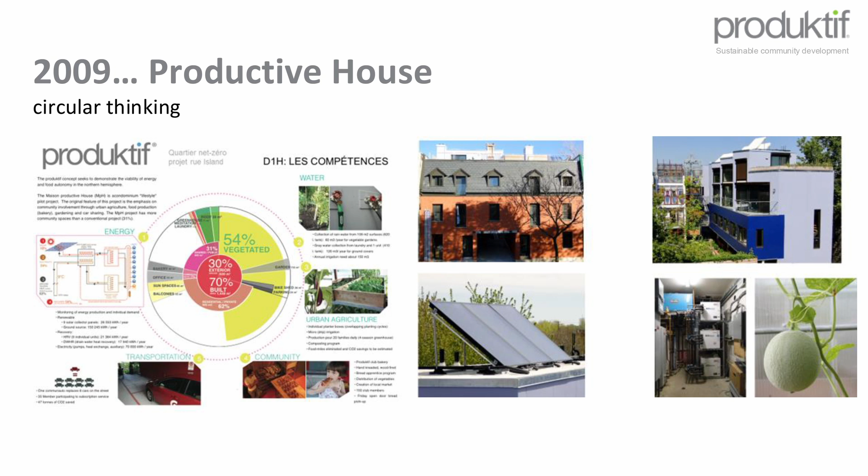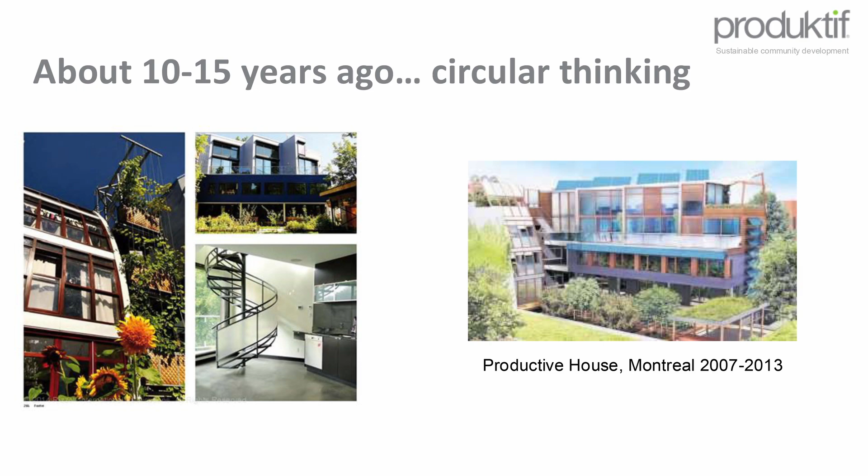And this is 15 years before people start catching on with circular economy. So I've always been a precursor. Later you can go and see the movies about this project that has been widely published. Avi Friedman made an extremely good summary and display of it in his book, Small Ecological Houses. I highly recommend it, and he explains it better than me.

So I moved on, new choice in life, went back to start Produktif, moved the business to Norway in 2020, and it's really about this idea of eliminating waste. Construction is a terribly wasteful endeavor: 40% responsible for waste, 40% responsible for carbon. It is stuck with innovation that dates 200 years.

It's not the fault of these people here. It's the fault of that toolkit up there. So I went through several, two series of 7 years, which I would call my crossing of a desert.

I got lost in my slides here. I don't know what happened. Need to go back. Oh, I'm going the wrong way.

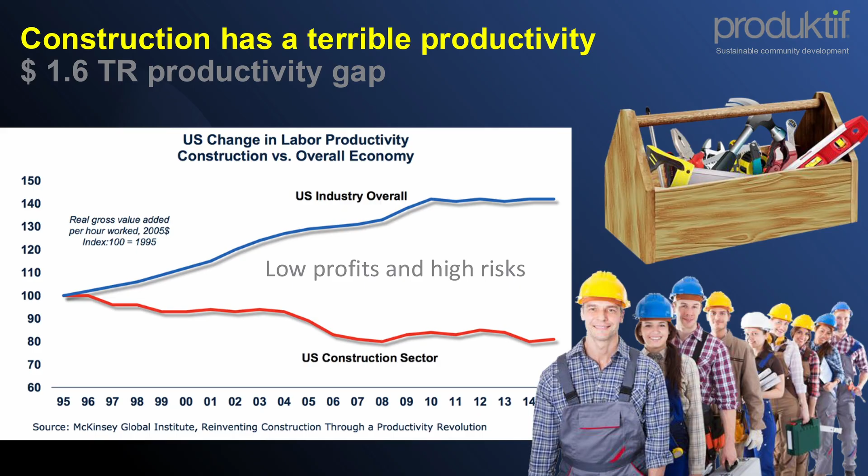During COVID and during this crossing of the desert where no one wanted to listen to what I was saying, no one. That's before the Norwegian government invited me to move back to Norway and start funding these ideas. I transformed myself from designing these joints for triangulation, for foundations and roofs, and also for squares.

Basically I figured that if I could design triangles and squares, I could design anything. So these geometries were scalable. I learned new tools like SolidWorks and CATIA.

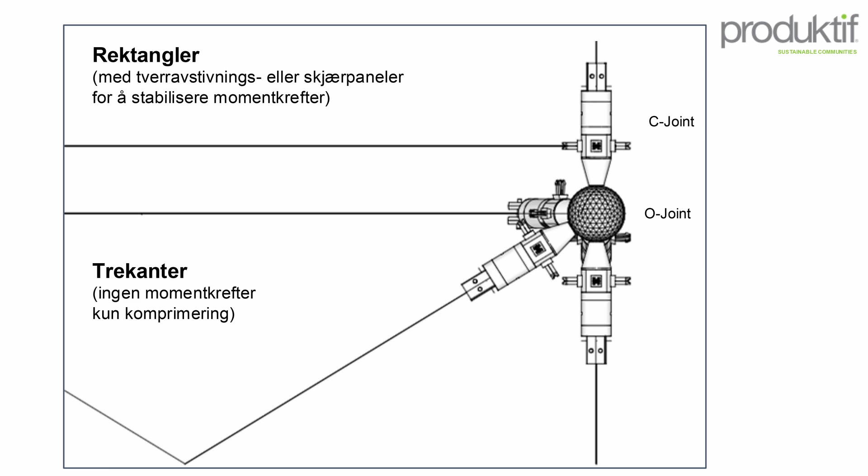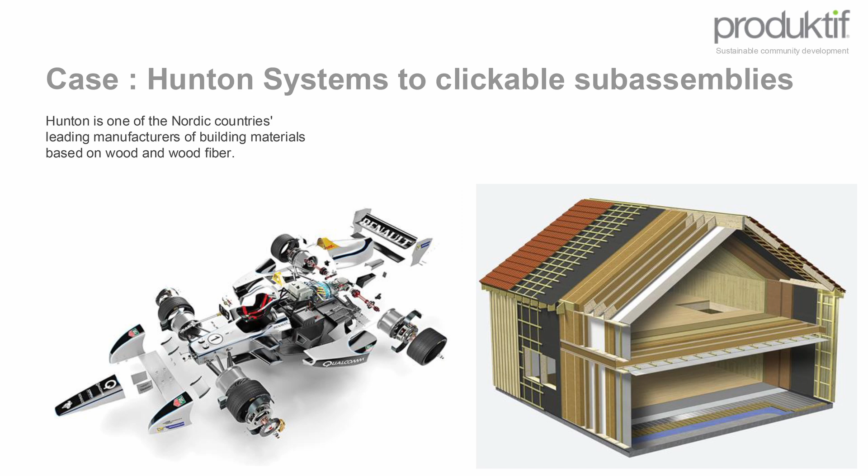For example, with Norwegian manufacturer Hunton, they make all these building components. We're basically reorganizing them into a modular process that we can put into a frame. And the frame, about 3 years ago, was just a grid that we could put joints over and then construct a frame. This is very proprietary.

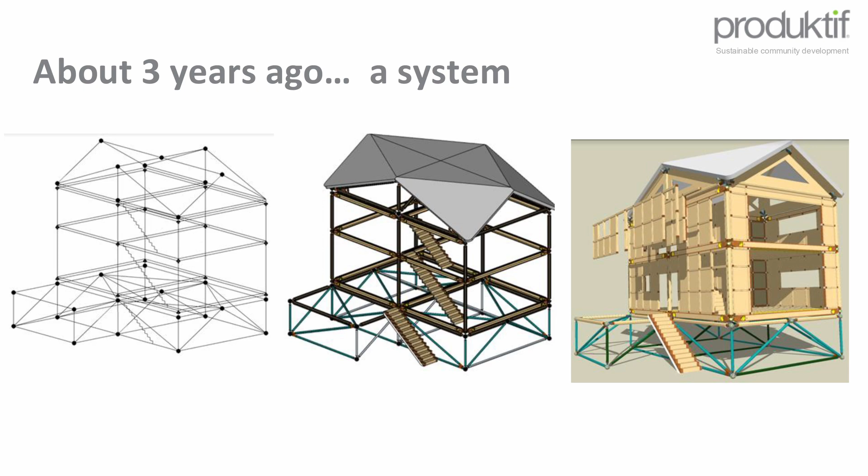I have 3 patents now on joineries and industrial processes. But now the part where you put panels into the frame to stiffen it, like shear panels, is now an open source, creative license part of the business where we invite a lot of people to come and participate.

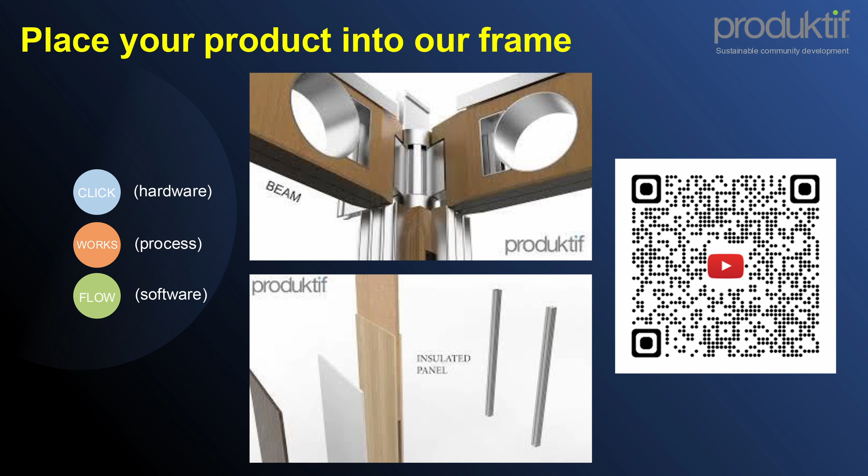And it works a little bit like this. I don't see the movie working. I said yes to something right now, so maybe it will actually play. That would be wonderful. So I don't know if you can see it. No, you can't. So it's actually opening up in a different screen. I think the settings have to be done so that you can actually see this, because that's an important part of the presentation. But I'll let that rest.

There's a system that I just displayed, and the revolutionary part of this is that in a typical American suburban home of 400 square meters, instead of having 10,000 screws, we can have 400 click joints, which would revolutionize the output.

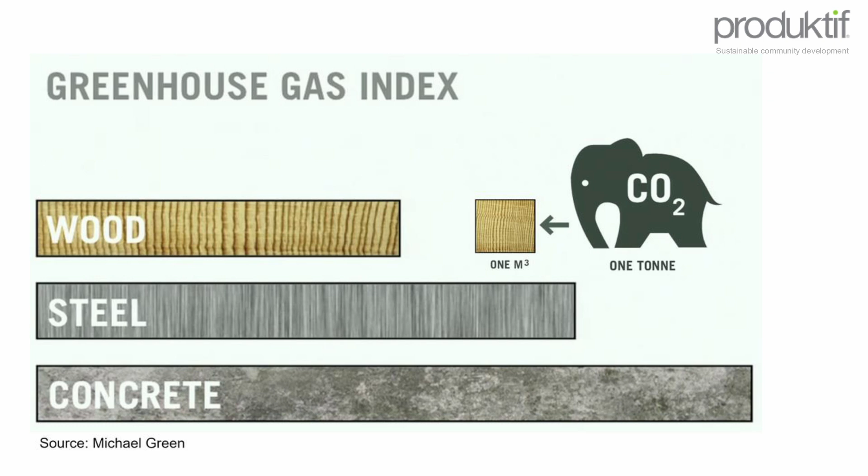Of course, we want to focus more on wood, but I'm agnostic when it comes to materials. I think we should use less of everything, and the solution is actually combining elements. So I think the result of using either steel, concrete, or wood is the result of how the industry is structured, often dominated by lobbying. But here we have to be, as architects, integrators, who are able to see different ways to make hybrid systems.

Our partners are actually coming from a whole supply chain where we globally source standard parts. We do local manufacturing, and to answer your question about construction being local, we have a model where we can put any local materials or panel into that local manufacturing process through pop-up factories and satellite factories that are close to the end user.

On-site assembly happens without screws and nails. No decisions are made on the site anymore. And finally, we have a digital platform that improves this whole process.

Our market is driven by the EU taxonomy, basically focused on how to bring financial actors and institutions into the aspect of reuse. We have won a major EU Horizon grant, several millions, to try to codify and certify these processes into the new building standard in Europe.

Now, I'm nearly done.

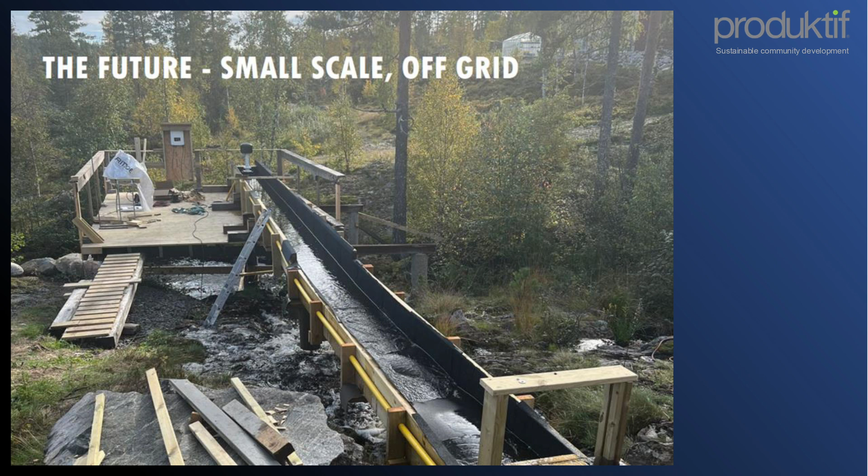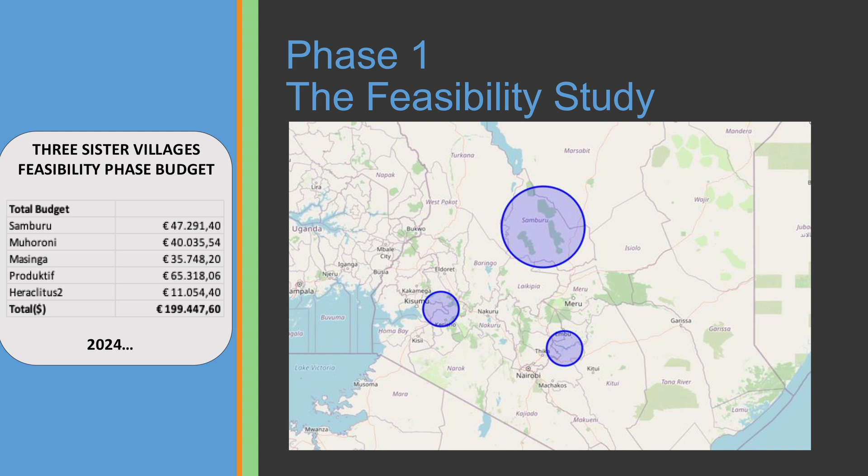Other projects that we're pursuing in Norway, on my farm, we're going to rebuild the old mill with our technology, using the power of the river to produce energy, creating something like this in the wild nature of Norway using our click technology. And in Africa, we are working with several grassroots organizations to bring clean water and energy to 3 villages in Kenya, ultimately empowering vulnerable minorities such as women and girls to not spend their time fetching water, but providing clean water and energy using our construction system to deliver fast.

Change can happen fast. We believe in an industrial process. I believe with industrial methods we will drive the cost down. I'm working with some of the leading industrial companies in Europe, in France, in Canada actually, and in Norway to make this a reality.